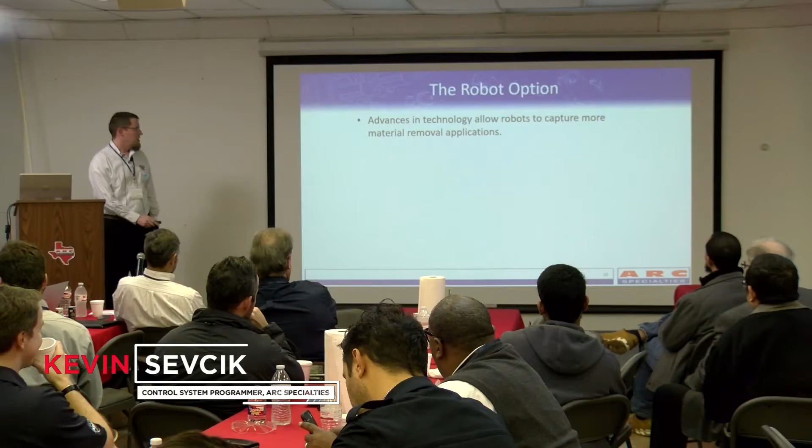So some details - we've been talking about robots this, robots that, but for anybody who's not familiar, this is backing up a little bit more, a general overview of things.

So why would you consider robots for material removal stuff and not, say, welding, where they're traditionally used? There's some new advances in technology that let us do more material removal applications than we used to be able to do in robotic applications.

Many of the subtractive technologies like oxyfuel cutting, plasma cutting, gouging, and things like that actually would benefit from the 6 degree of freedom capability of robots. Normally you have an oxyfuel torch attached to a gantry system and it can only do flat cuts. Maybe you put a beveling head on it and you can do beveled cuts or things like that.

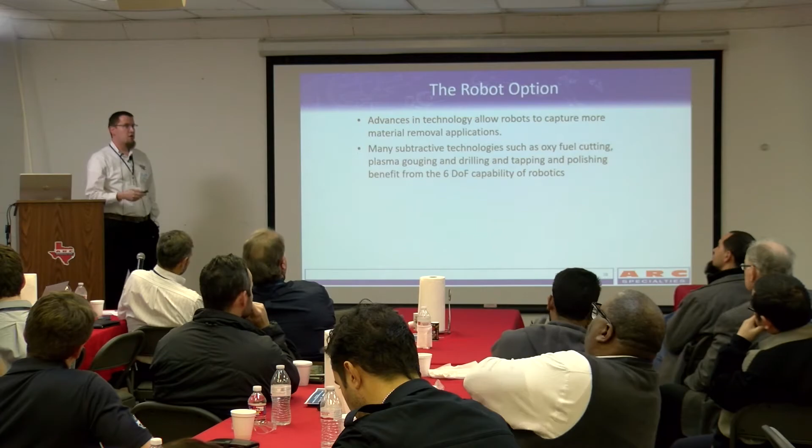But in the real world, there are 3D surfaces that exist, and it would be nice if we could automate those processes as well. So that's where we're looking at and have some applications doing that more advanced cutting and material removal. Robots have different strengths and weaknesses compared to traditional machine tools.

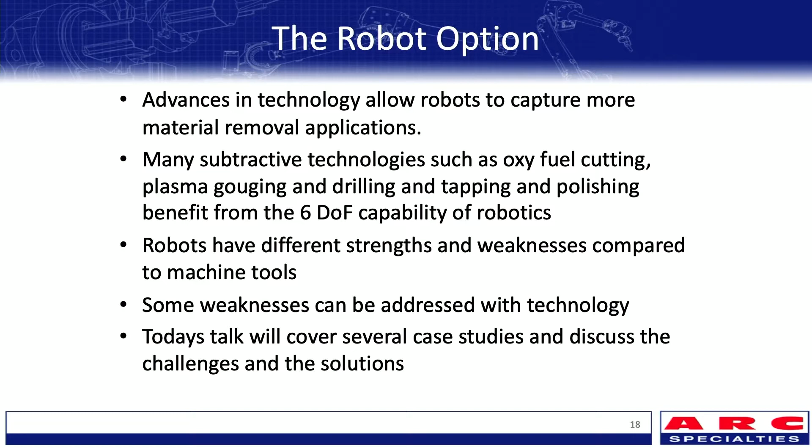So it's important to understand those when you're doing these sorts of applications. Some of the weaknesses can be addressed with some new technologies and techniques that we can use on the robots. I'll go over some of the weaknesses after I go over the strengths. So we'll cover all of that and some of the applications that we've actually done.

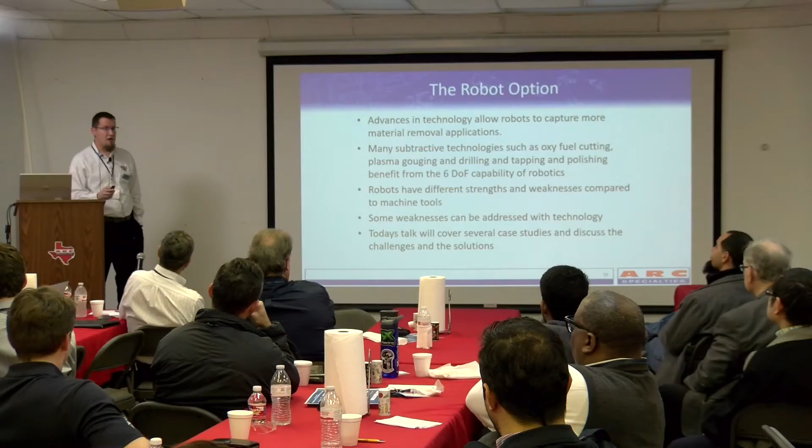So first off, why robots? Equipment cost - robots are generally cheaper than large machine tools. When you get into small workspaces and things like that, it's about equivalent. But on larger things and larger sizes, robots can be cheaper until you get into extremely large workspaces that you're working on.

Work envelope versus the footprint of the machine. Any kind of traditional machine tool has to surround the object that you're working on. Robots don't necessarily - robots reach out from a central space, so they're more flexible in how you can set these things up. Also less overhead, so it's easier to move parts in and out.

And then the number of axes and positioning flexibility. Anything that you're doing past 3 dimensions on a machine tool costs you more because you have more motors to add than just the 3 linear motors. Robots already come with all 6 degrees of freedom that you could possibly want to use, and then you can add more on top of that.

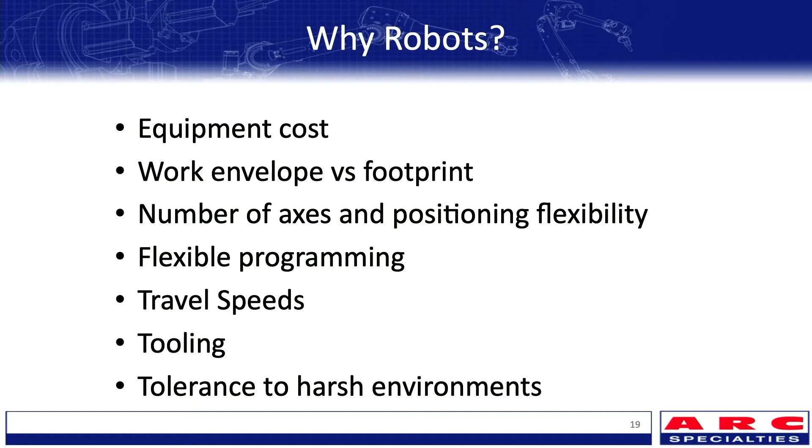They have more flexible programming. Machine tools are usually G-code programmed. That's very, very restrictive. You can do some work offsets and things like that, but mostly you generate a program in a CAM package, and then that's what the machine tool runs.

Travel speeds - robots can usually travel faster than large machine tools, but there's some advantages there when you start talking about really large machine tools, it's a little bit even, actually. You have more tooling options with robots, especially when you're talking about tool changing.

If you get an oxyfuel cutting table, it's mostly just an oxyfuel cutting table. You can add a plasma torch to it. You can't add a deburring system to your oxyfuel cutting table. With a robot with nice ATI tool changers, you can add whatever sort of tools you want to, so you can do multiple operations in the one spot.

And then robots are more tolerant to really terrible environments like thermal spray, things like that. Machine tools, you have to do way covers and everything like that. Robots, worst case is you just have to...

Sorry, Windows just wanted to restart.

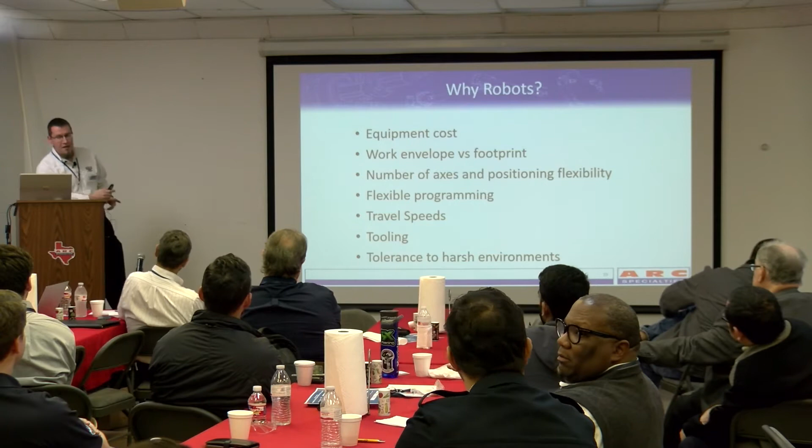Okay, robots - if you need to protect a robot from a harsh environment, you just put a sock over the robot, worst case.

So back on the cost thing, machine tools can be $1 million plus if you're talking about really, really large, heavy-duty ones. Robots, you can get up there in robot expense, but not that much.

Machine tools come with your tool changers and your spindles. All the tool changer is usually just restricted to mill bits and things like that. Robots, you can add a spindle to it, and then you can add a tool changer, but you can have flexible tool changers, compliant tools, plasma cutting, whatever you want to put on the end of your tool changer.

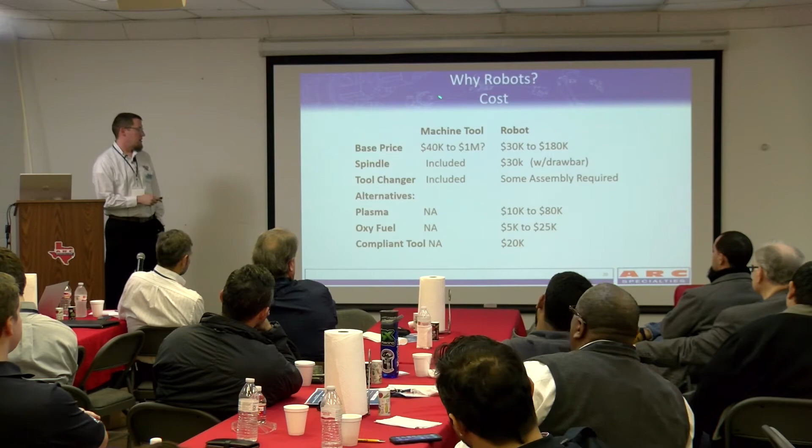For traditional machine tools, you're either going to pick a milling spindle, plasma, or oxyfuel. You're not going to be able to switch between them. For a robot, you can pick whichever one is cheapest and best for your application, or do all three.

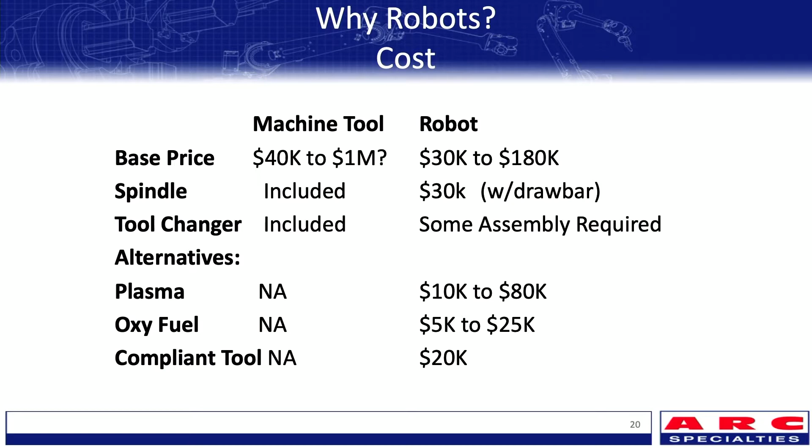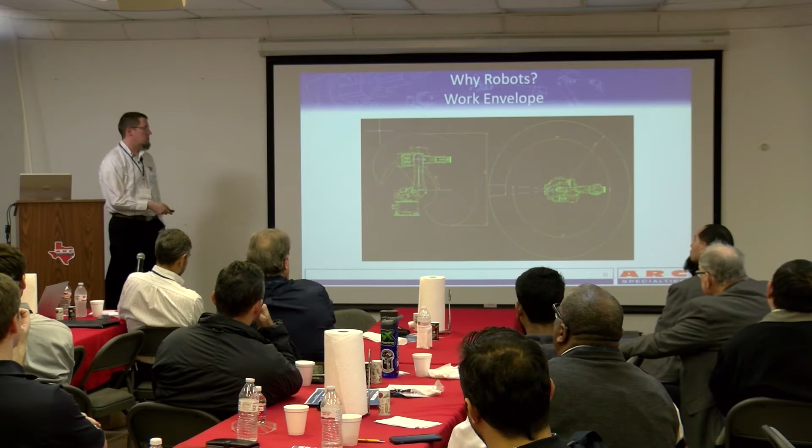Many robots come with software to handle additional axes, so you can tie a coordinate system to it and have all of that automatically coordinated. So you don't have to add that into your machine tool capabilities. Most machine tools, if you're trying to add extra axes, don't even necessarily coordinate that. Your CAM software has to handle the coordination on it.

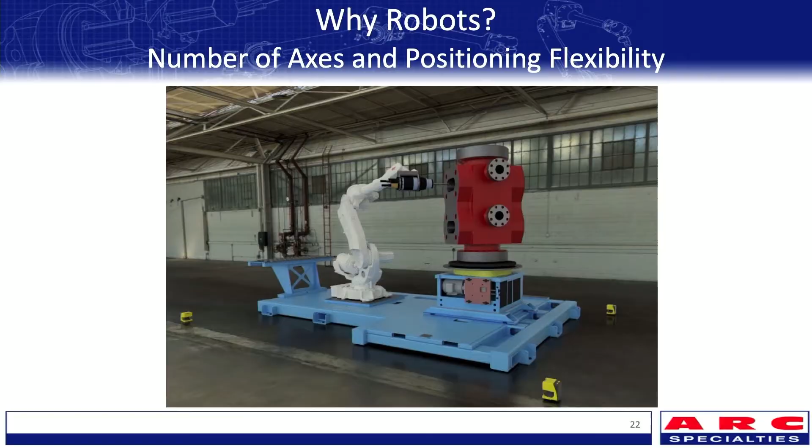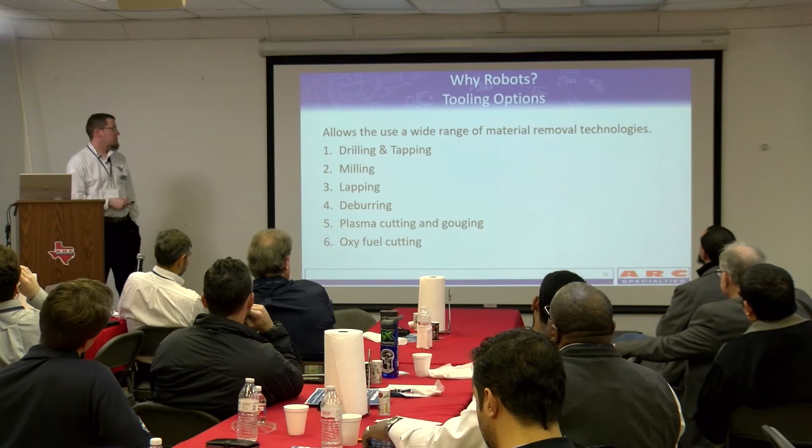Tooling options: you can use a large number of material removal techniques, and you can do them all on one robot if you so desire. You can have drilling, tapping, milling, lapping, deburring, plasma cutting and gouging, oxyfuel cutting and gouging. You could have a plasma torch on a robot to cut all of your pilot holes and then come back with your drill or tap to tap it, or you could just drill all the holes. You can combine all of your material removal processes to most efficiently make your parts.

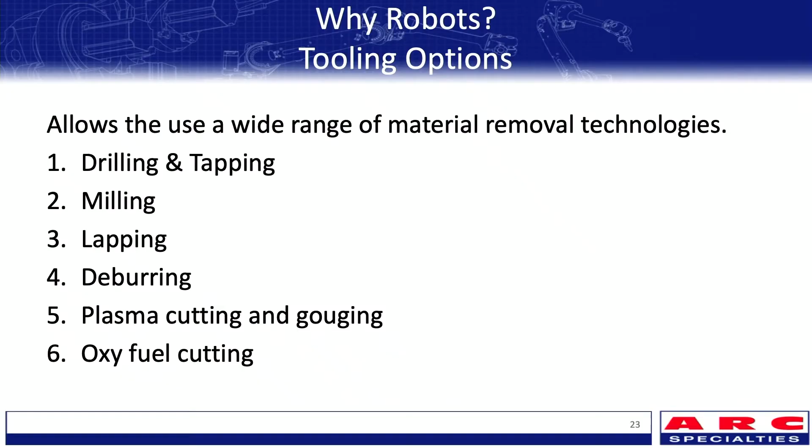This is the one that I specialize in. The flexible programming of robots is the main thing that we focus on here because we love robots. Machine tools, even your most advanced conversational machine tool interface, is basically you're configuring a couple of dimensions in a part or something like that, and then you run it. But it's still going to run a canned software, canned path.

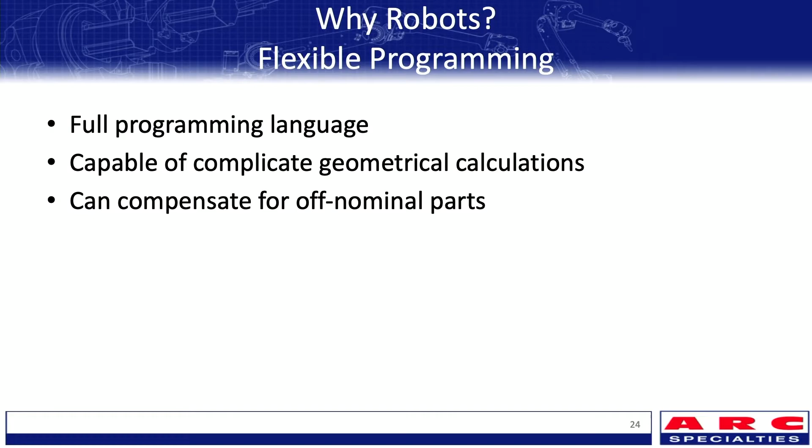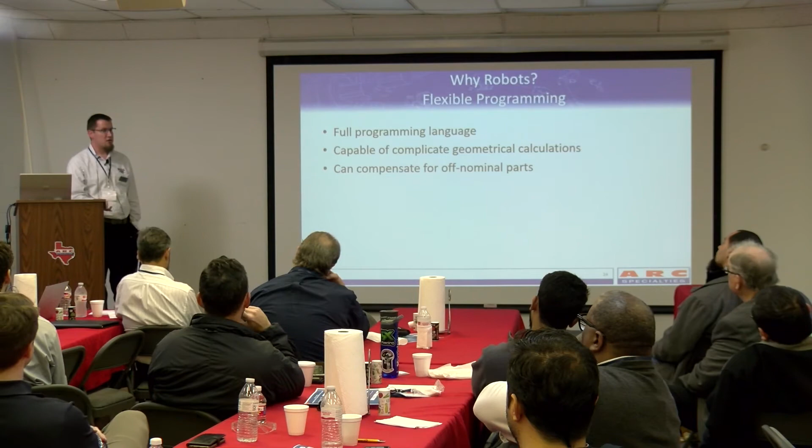On a robot, you have a full programming language that you can do geometric calculations on. So you can bring in dimensions and have the robot actually examine the part and adapt the program it's going to run to the part, versus on a normal machine tool, you buy stock that's bigger than you need and whittle it down till you get what you want. On a robot, you can buy your finished part and then measure it, because some parts have poor tolerances, and adapt your program to match your cutting paths and material removal paths to the part. So you can compensate for off-nominal parts which exist in the real world.

So why not robots? It also comes down to the programming. Any advanced programming that you want to do, you're going to need more than just a CAM package to do it, even more than just Robot Master or anything like that. So you will either have to hire or become an experienced robot integrator to do it.

You do have teach and repeat as an option on any robot, which is good for simple operations, and if you add extra software packages, you can make those adaptive with seam tracking and things like that. But eventually, if you want to do very advanced adaptive stuff, you're going to have to do some more complicated programming.

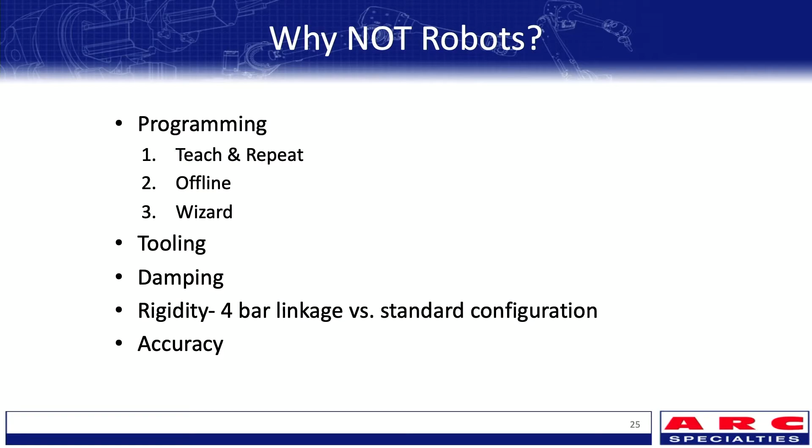There are certain tools that you can't run on a robot. Large diameter cutters and anything with large tooling loads -- the larger the tooling load gets, the more difficult it is to run on a robot, because robots have poor damping. A machine tool is ball screws on linear slides, so it's extremely stiff and rigid, making it easier to control tool chatter and things like that. The robot's stiffness comes entirely from servo drives.

So it's harder to control chatter and tool loads affecting your path and affecting the robot. You can address some of the rigidity with your robot selection by picking a bigger, stiffer robot. But the bigger and stiffer you get the robot, the worse your accuracy gets, because it's servoing bigger joints, the joints are stiffer themselves, and it's just bigger linkages and bigger joints, bigger robot. So most robots have difficulty with accuracy.

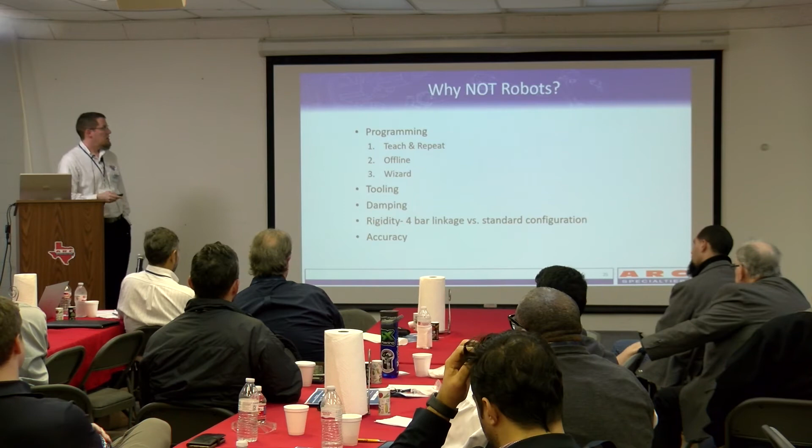Every robot maker will quote their repeatability. Repeatability is usually excellent, but repeatability is: you teach a point right here at the top of this A, then you move over here, and then you come back, and that's your repeatability. You can get like 0.2, 0.1 millimeter or better repeatability on robots.

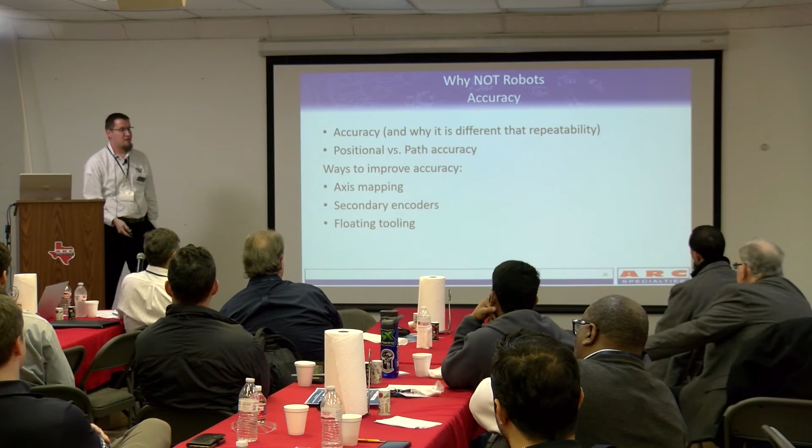The problem and the challenge is usually absolute accuracy. There's a difference between always coming back to that point, and programming a point at 0,0,0 right here, and then programming a point at 100 inches over here, and actually having those be 100 inches apart. Absolute accuracy over the workspace is not usually good on robots, because it depends heavily on exactly calibrating the angle and the lengths of all the linkages.

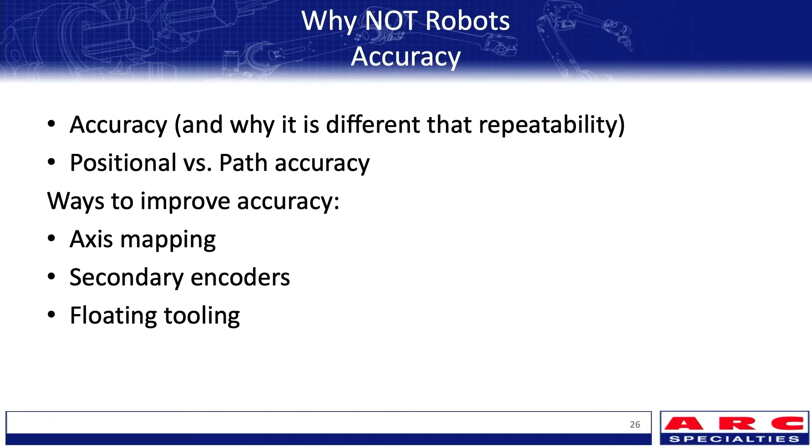So it can be addressed through mapping the axes, adding secondary encoders, having compliant tooling. There's also calibration that you can do on robots to exactly calibrate the kinematic model of your particular robot, and that's what I always ask for on my robots. I don't always get it because of budgets. That does increase the price a little bit, but if you do that, you can get a more accurate robot that's more reliable for offline programming.

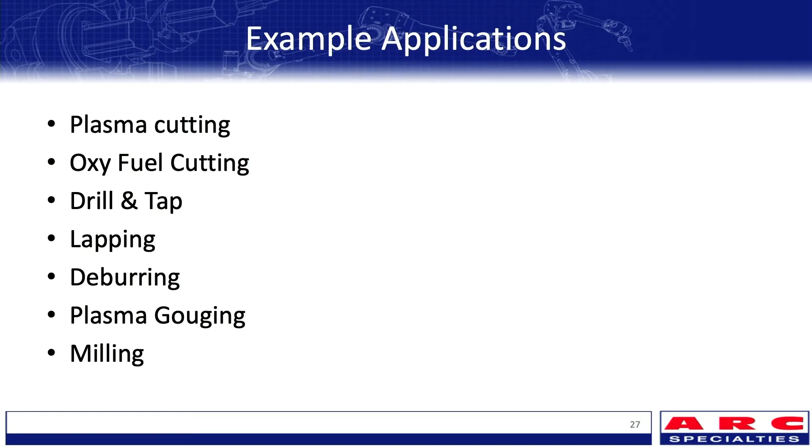And now the interesting stuff. Some example applications that we'll be going through: plasma cutting, oxyfuel cutting, things like that. Some of this is going to be compared to kind of traditional machine tool applications and selection of which material removal process you want.

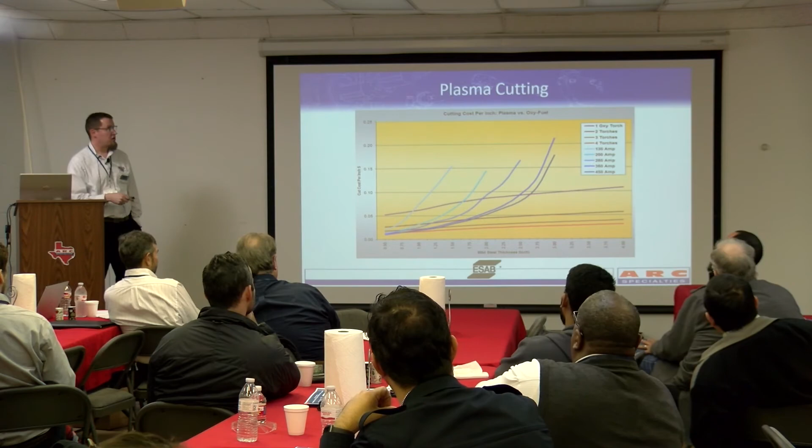So oxyfuel is relatively cheap for most cuts, but it suffers from accuracy problems, and the fact that you can only cut steel with it. So plasma is good for certain cuts, certain materials.

One application that we did, back to flexible programming, is we have a pipe profiling machine system that we're doing wizard-based programming on. So instead of running everything through a CAM package and building the program that way, the operator just puts in all the dimensions that he wants, similar to the flame cutting that Randy, the thermal spray program that Randy had, only for whatever sort of cut you might want to do on a pipe. The main advantage is that we just dump all of these dimensions to the robot.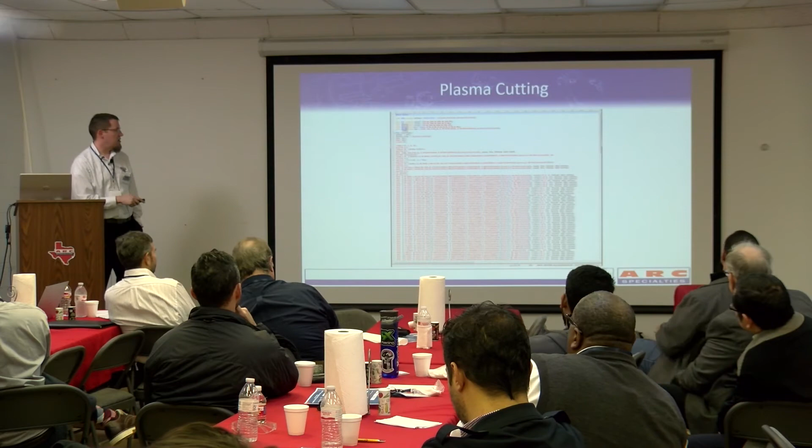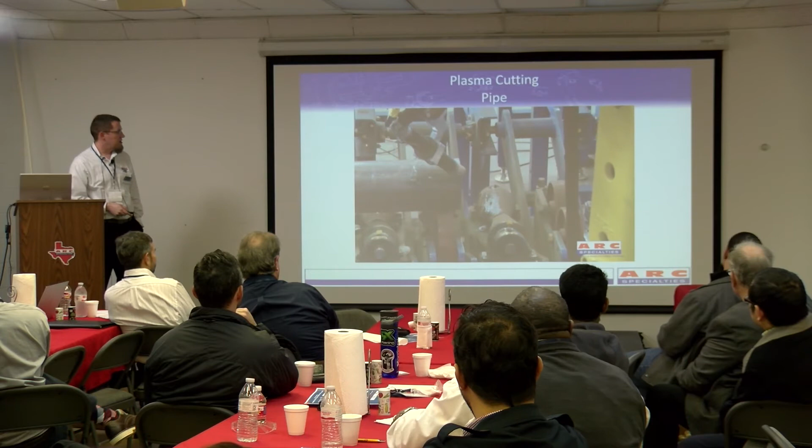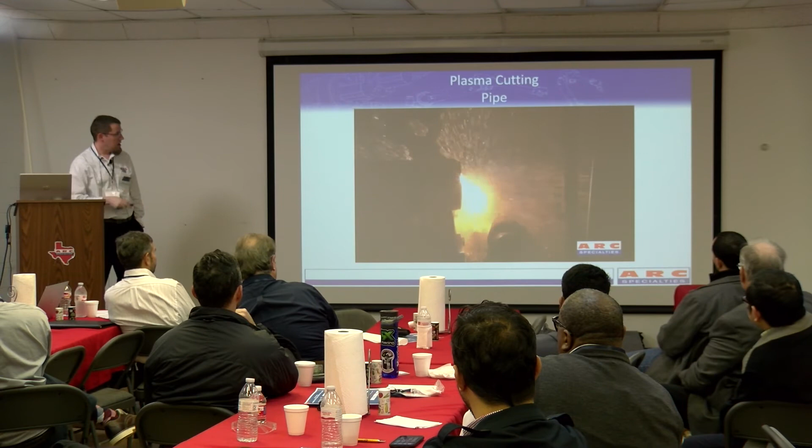And then the robot can calculate the cut path for us. So we can generate an approximate cut path offline, then take all of that, dump it to the robot, and then have the robot modify the cut path further based off of what it finds about the geometry. So this is actually the profiling machine - oh, we cut it too soon. So it's actually finding the beginning of the seam, the end of the pipe, and then offsetting everything from there. And then we're beveling the end of it, and there's large amounts of holes that we'll cut and things like that.

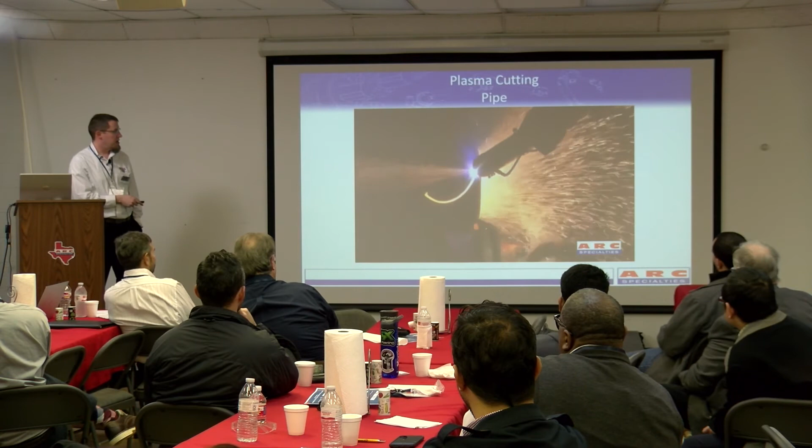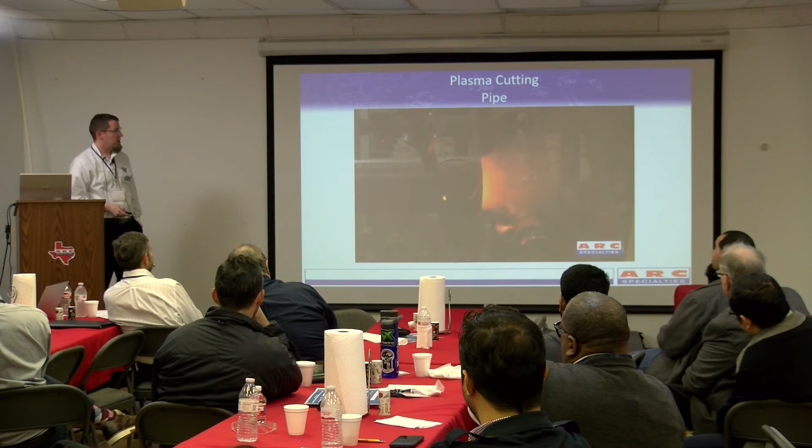One of the challenges on this machine is that it's actually cutting a large number of pipes, so a long length of pipe and then cutting parts out of that, and it's all resting on top of turning rolls. The issue is that the pipe is not straight, so we actually have to touch off on the end of the pipe at multiple locations to characterize how much it turns around, and then modify our program to account for that. Even more challenging than that - this one was relatively easy because it's a round pipe and we know more or less what the dimension is.

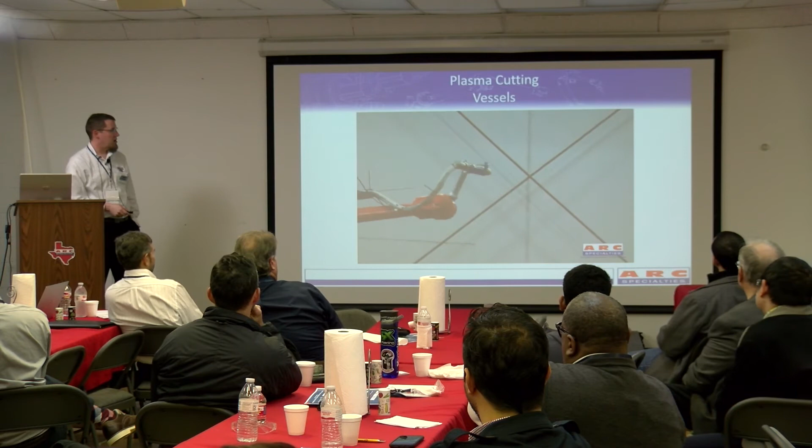The more challenging one was this one for cutting holes on the sides of a large shell that's sitting on turning rolls and would sag. So what we actually do is a slow process of touching off on it, on the sides, to calculate exactly what the curvature is at that location, and then modify the cutting program to actually unwrap it to make a round hole as opposed to a not round hole.

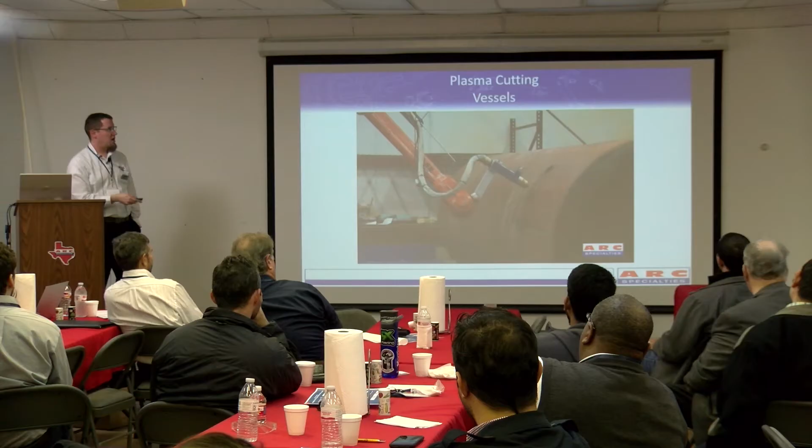And then versus cutting it by hand, this was actually a stitched cut that is more difficult to do by hand. It's a nice round cut, but we'll put stitches in it so that it can be knocked out later as opposed to just dropping in.

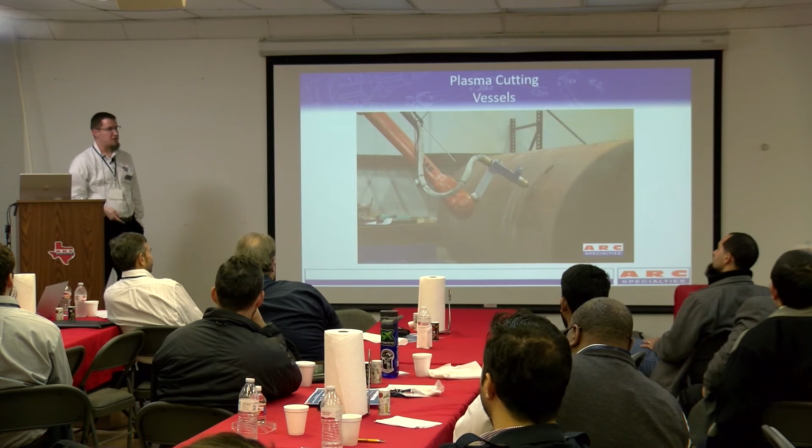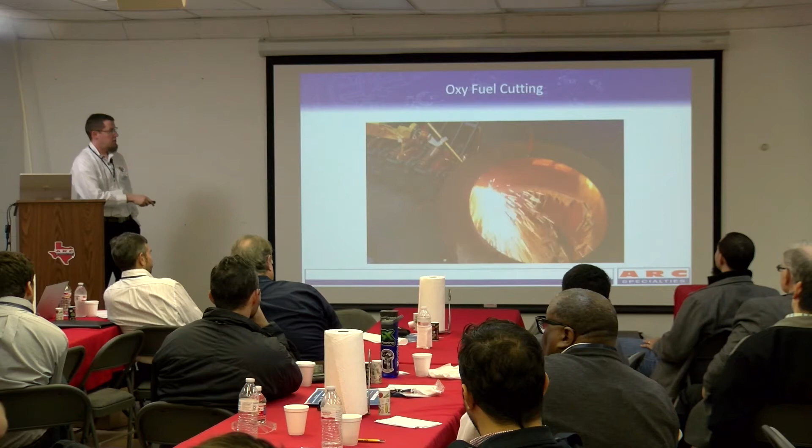So this one was the oxyfuel. This is actually the same machine as the first video. We just changed out to an oxyfuel torch because we can't get through this with the plasma torch. So that goes back to the flexibility in tooling. This is actually coping the inside of that pipe nozzle, which is like 4-inch thick steel, so we just could not get through that with plasma.

The customer's original tooling for this, original robot, was based off of cam plates, magic sort of stuff. So with this one, we just took the robot and built that whole cutting program, slowing down as we get to thicker cuts, speeding up as we go to thinner cuts, and holding a much better tolerance.

I was actually surprised when I came to their shop, because we had originally considered it for just very large nozzles like this, and he put a 4-inch diameter part on the table and then cut it with the oxyfuel torch, which was an impressive amount of flexibility that I didn't know I had actually put in the system. It was kind of hilarious seeing a giant oxyfuel torch cutting a part that was significantly smaller than itself.

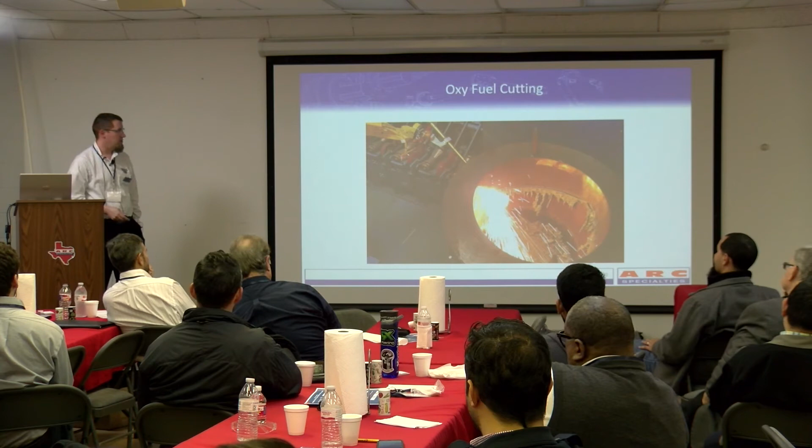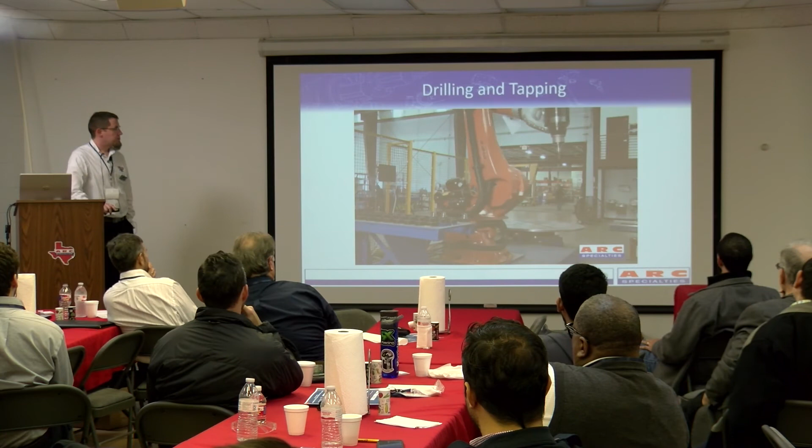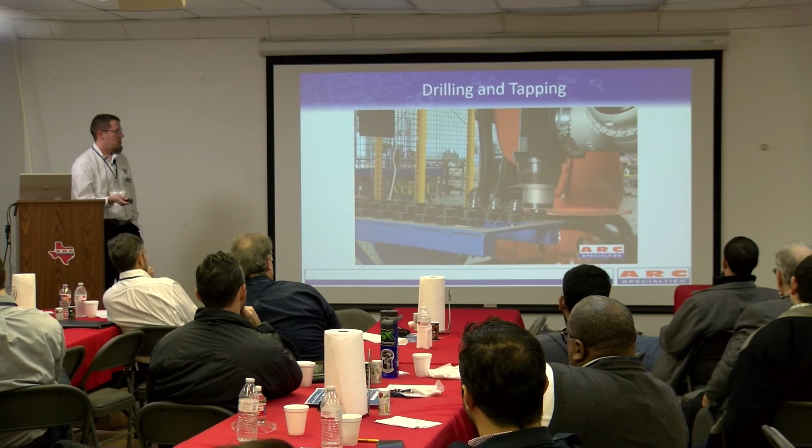We've got drilling and tapping machines that we've done. I didn't cut this one. So we can approach the part from multiple directions. Tool changers and things like that, so we can pick the different taps that we need, approach the part from whatever direction we need to, and drill and tap holes on it.

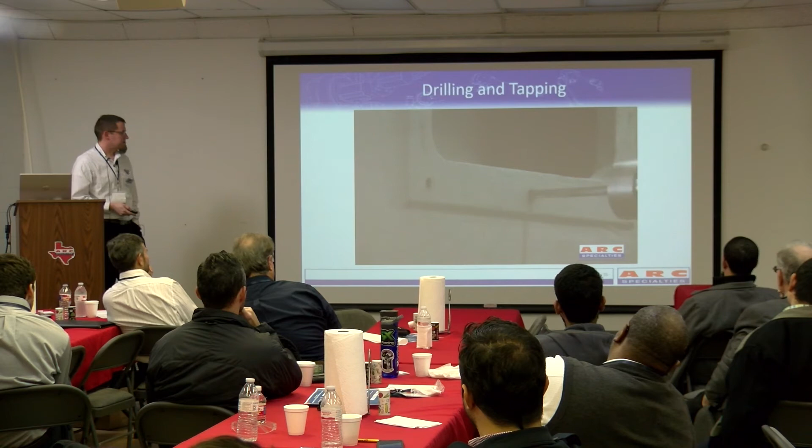Right. I'm going to cut that one short.

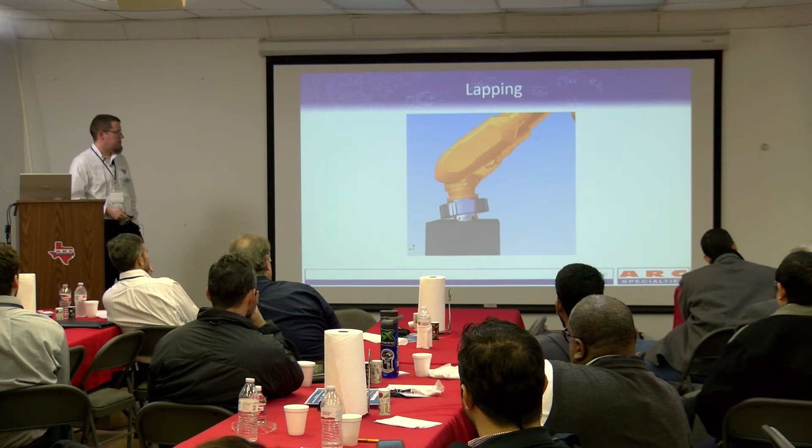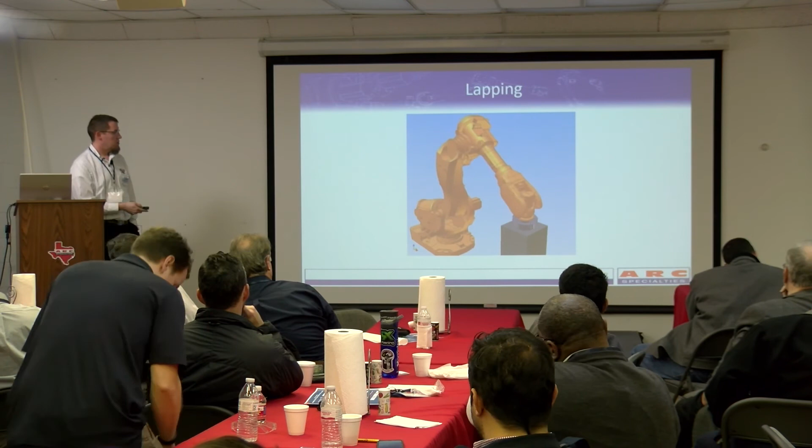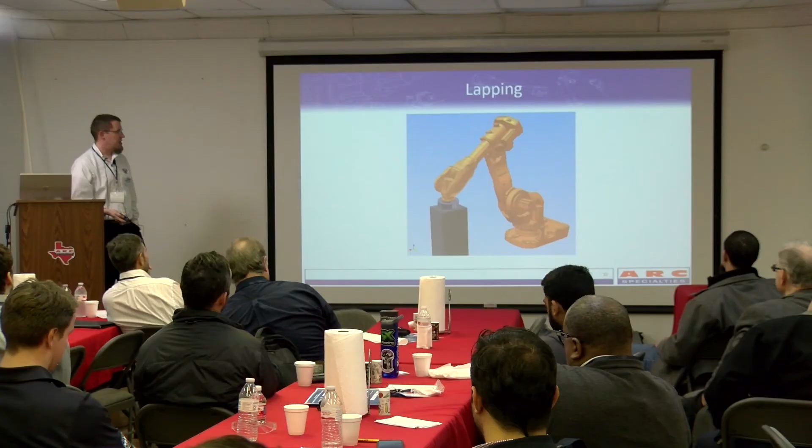Okay, so lapping. This is a lapping robot that we did where we really take advantage of the degrees of freedom of the robot. It's hard to make a machine tool that does this, so we've got a robot that'll do it for us instead. And it makes it easier to change things out, because instead of having to change out a lot of tooling, you can just change the position that the robot goes to. You still have to change out the lapping plate, but you can change the position the robot goes to instead of having to change a bunch of fixturing and positions of fixed slides and things like that.

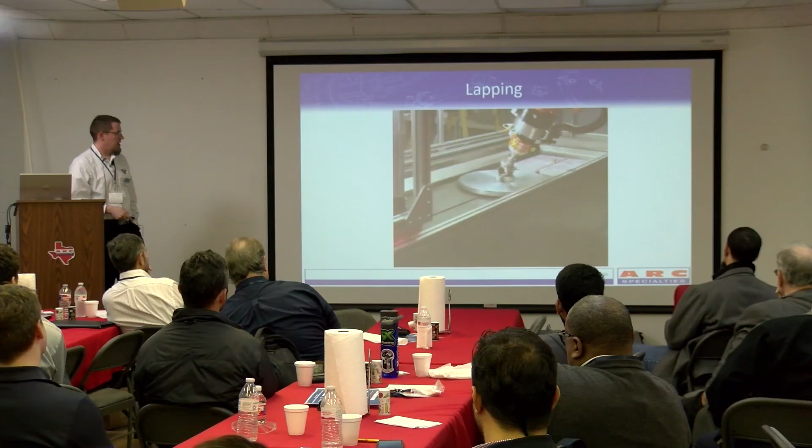That's actually a compliant tool that we have on the end of it. You can see the spring. And then we also have a load cell in there to measure the force that we're exerting.

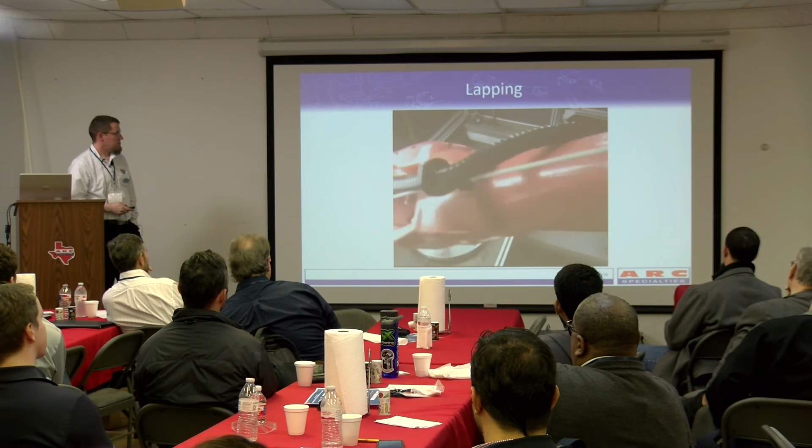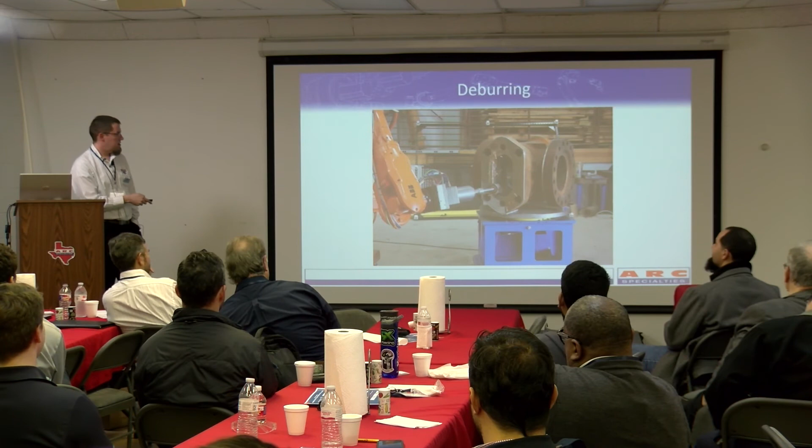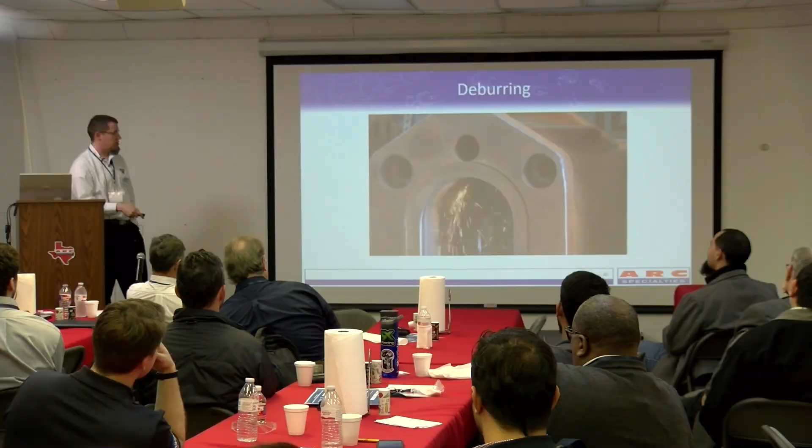And then deburring, we were actually ready to grind before KUKA was ready to grind. So that's a PushCorp compliant slide on there. It's only compliant in that long direction right there, you can see the travel limit. So we need the robot in order to use it, because we have to keep that compliant direction perpendicular to the direction that we're actually engaging with the part. So we've done deburring operations as well.

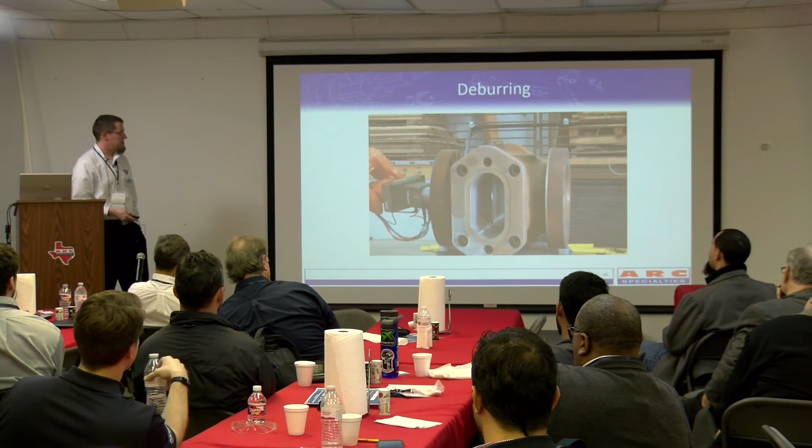Right, to the more interesting thing: knee surgery. Dan somehow observed a knee surgery and was shocked and appalled at the state of the art. So total knee arthroplasty is what they call it, and they basically take off the entire outer surface of your femur and your tibia, which is upside down here. So that's your foot up there at the top. Femur right here, tibia right there. They take the whole thing off, then replace it with metal, and then metal and some HDPE.

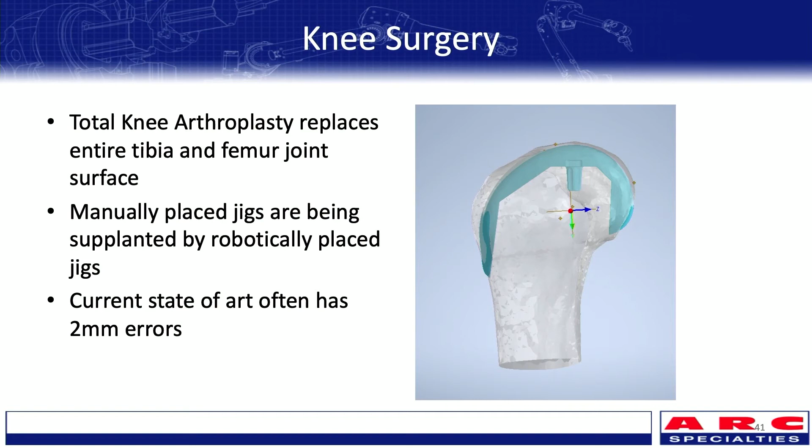The very, very original process was they would basically drill and bolt a jig to your leg and then use a Sawzall, a medical grade Sawzall, to cut all of these flat surfaces. And that was the state of the art. The current state of the art is more or less robotically placed jigs.

There are robotically placed jigs where the robot will place a flat cutting jig and the surgeon goes in with a saw to make those cuts. And there's one system that uses haptic control with force guiding to make sure you don't exceed the boundaries of the cut you're trying to make.

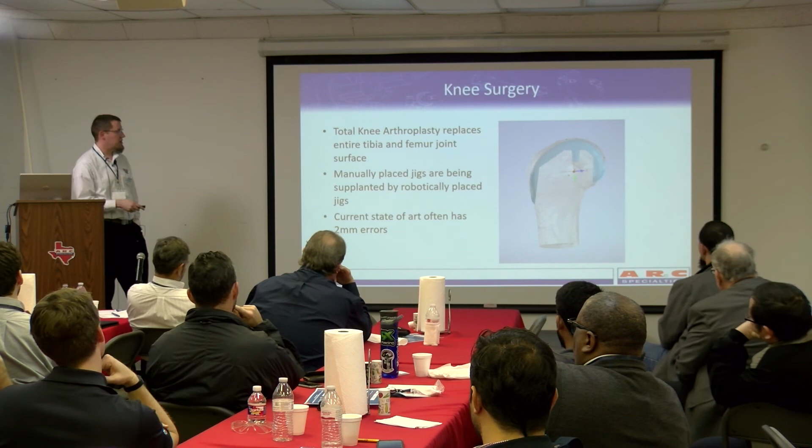But many of them have significant errors, which is kind of shocking. They can be up to 2 millimeters of error, and we thought we could do better than that.

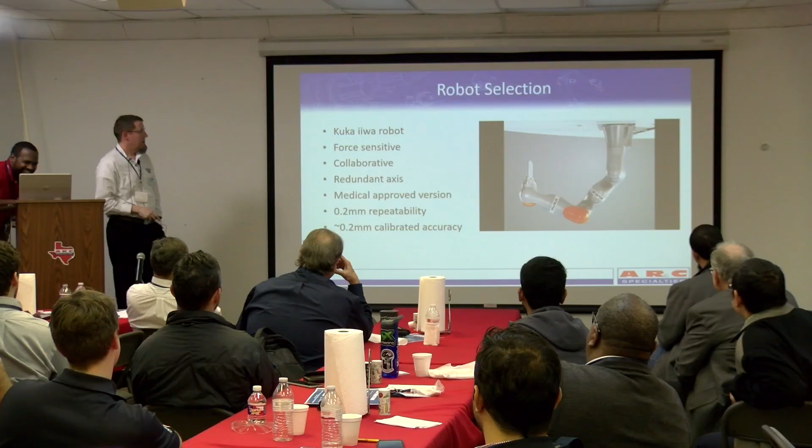We decided to pick a KUKA robot for a couple of reasons. At any rate, we picked the KUKA iiwa robot.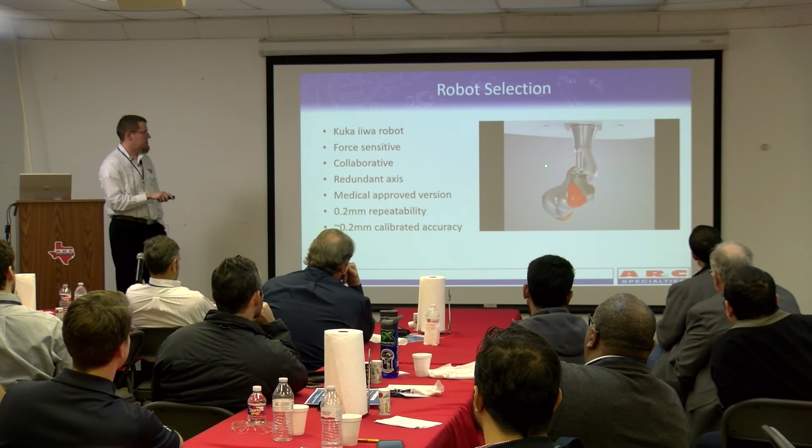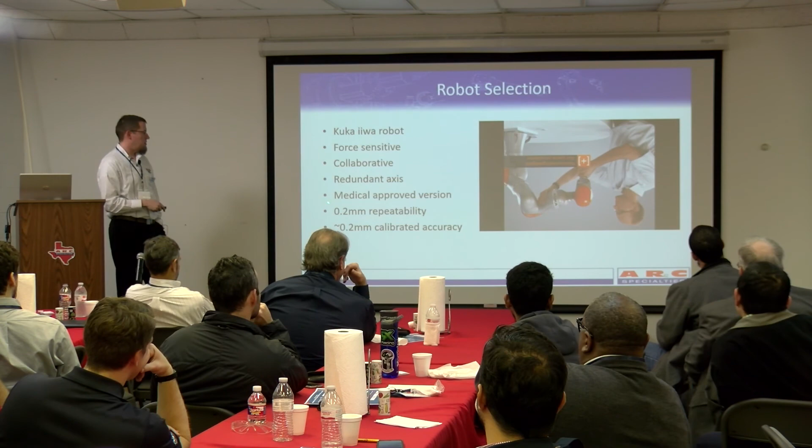It's a force-sensitive robot. It has torque sensors in all of the joints, so it can estimate how hard it's pushing on the end of the robot. It also has this redundant axis, which is very useful for how you're approaching things—that's actually an extremely unusual motion for a robot to make. It's a collaborative robot, which means it's safe to work around, and it has a medical-approved version, which was useful since we're trying to do a medical application with it. It's got the standard 0.2 millimeters of repeatability.

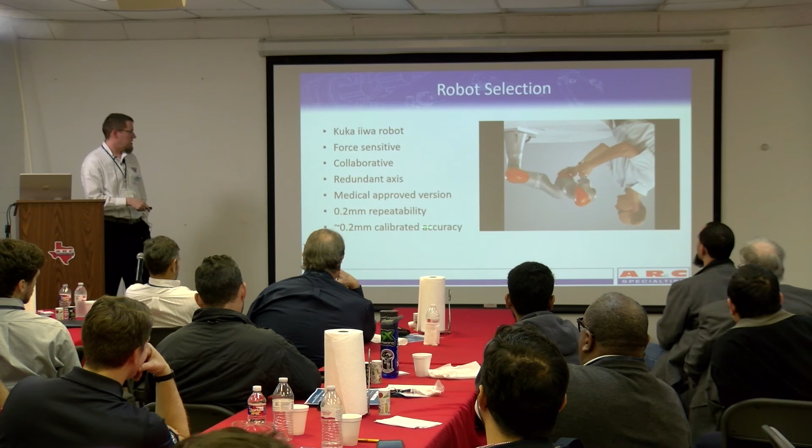The out-of-the-box uncalibrated accuracy is not excellent, but there are people who have done calibrations on it and can get it down to about 0.2 millimeter accuracy, which is what we're aiming for on the knee surgery robot. So we're confident we can get the kind of accuracy that we want out of it.

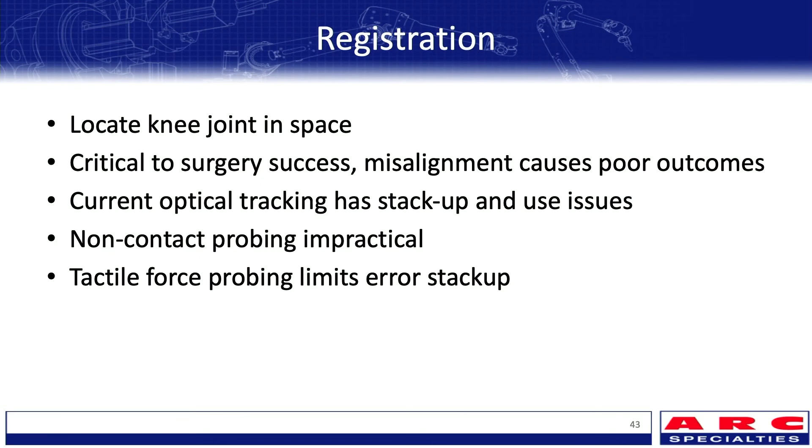The first step in the process is registration, where you have to locate the knee joint in space, because when they put you down on the gurney, there's no telling exactly where your knee is relative to the robot. It's really important to the success of the surgery, because the distance between the final prosthesis surfaces matters—if they're too close together, the joint is too tight and your knee doesn't bend well, and if they're off angle, your knee bends crooked. All of that depends on how you locate the knee originally.

The current method is to use camera trackers and probes. You calibrate the robot to a camera, then calibrate the probe to a camera, then probe with that, and there's multiple back and forth that has stack-up issues on the tolerance and error. We were considering non-contact probing with laser sensors or things like that, but there's cartilage on top of your bone, and CAT scans only measure bone.

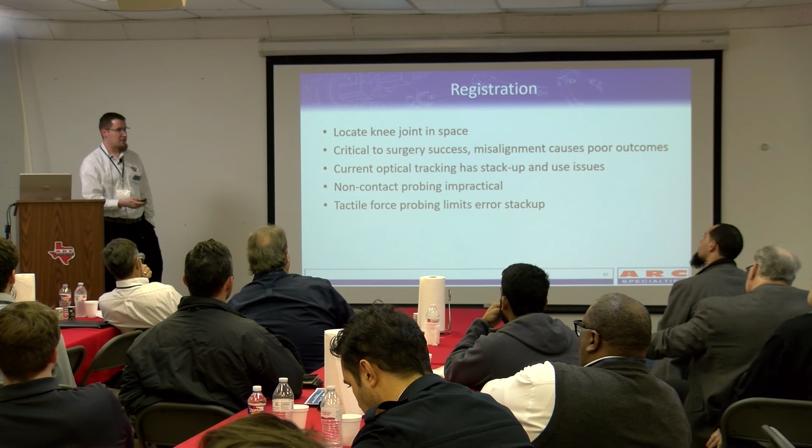So visually, the only thing you can get is the cartilage, but the plan is actually made against the bone, so you can't do that. What we're actually going with is tactile force probing, where we use the force-sensitive nature of the robot to push through the cartilage and detect the bone underneath.

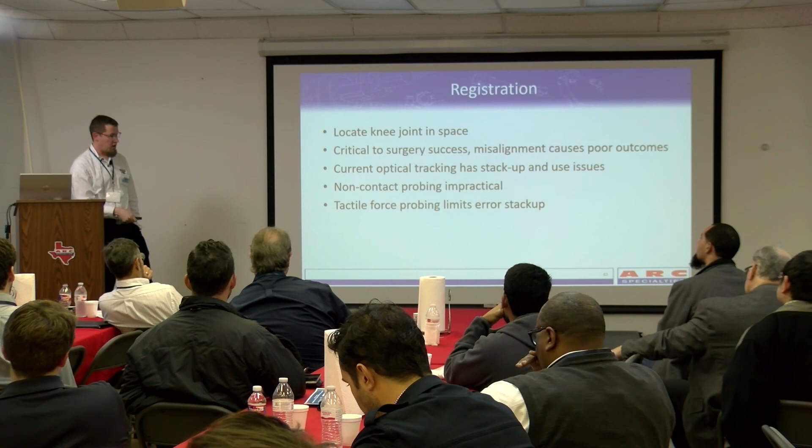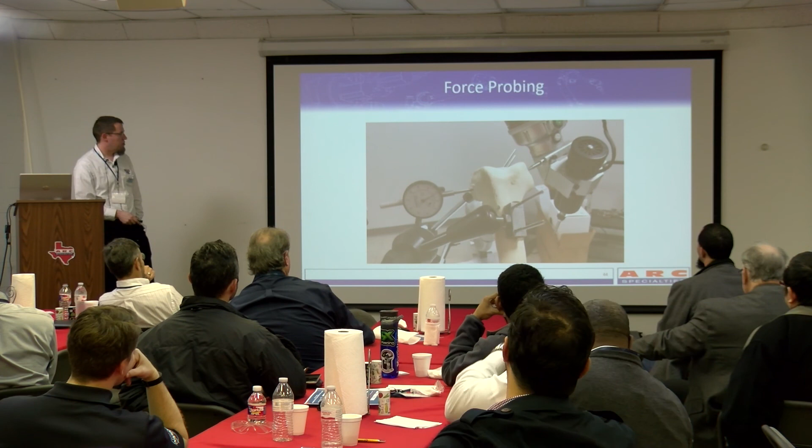This robot right now is calibrated to poke at 2 pounds of pressure with that probe, and preferably not move the bone at all while doing that.

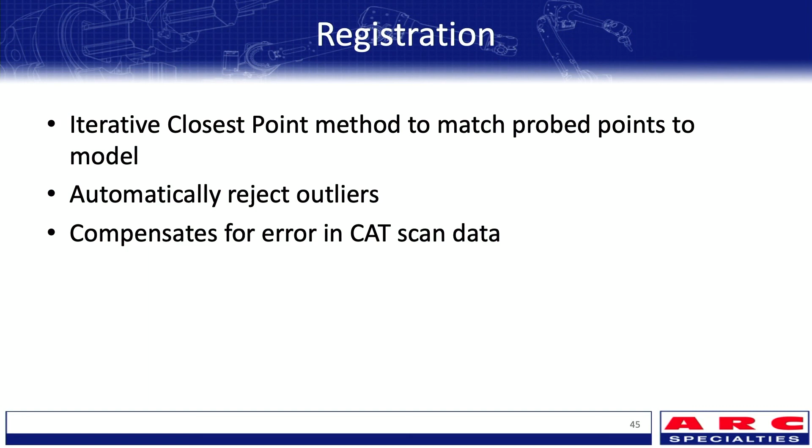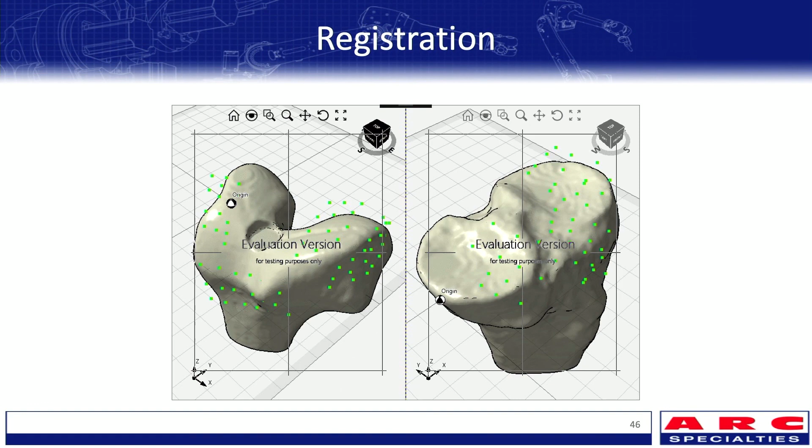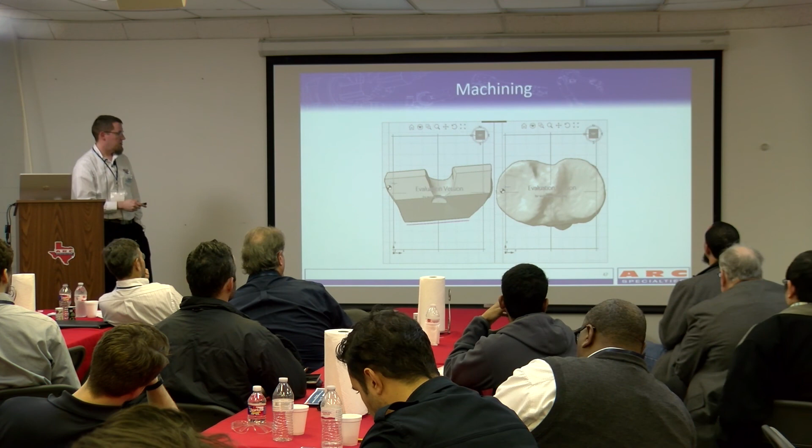Then it's just calculating cut paths and actually running a machining operation, which is a normal sort of machining operation. Amazingly, a standard ball end mill works well for this.

With our currently uncalibrated robot, we're getting about 2 millimeters of error in the alignment, which is where the state of the art is right now—and that's with our uncalibrated robot. So we have good hopes that it will be better.

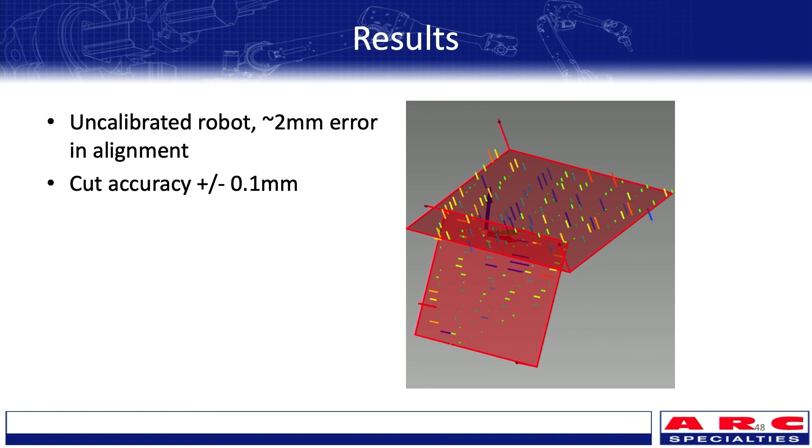The actual cut accuracy, how flat the cuts are and things like that, is about 0.1 millimeter. So it makes good flat cuts that are just not necessarily aligned exactly how we want them. Once we calibrate the robot, we think that'll get better. And that's it.